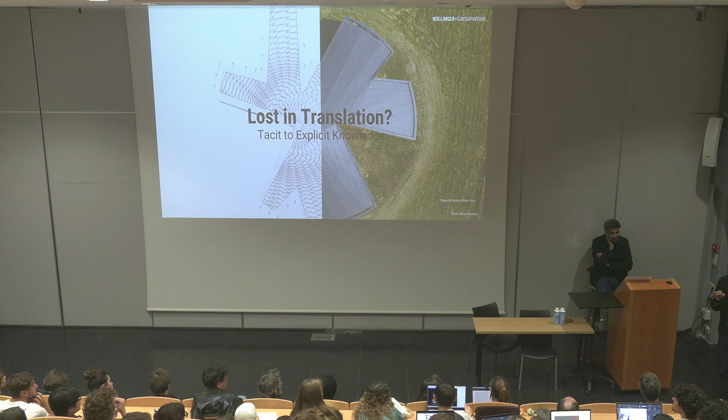So what happened is we met yesterday evening and each had our presentations, and this morning I asked my team to mix the two presentations together. So it's going to be a bit of a surprise for the two of us as well — we might have to jump some slides, and I don't even know the total number of slides. So if something comes up, we'll find out together with you. It's a bit of a journey for ourselves, but we have to put ourselves into these things, since we already talked about the conference for quite a long time.

We took this image because it's typically one of a professor that you have here at the school. That's one of these projects we worked on for a very long time — a very, very tiny project, 400 square meters for only 500,000 euros, so it's quite cheap, and it's very complex. That's the one project I wanted to use to explain the lost in translation.

Before that, one colleague gave me this image at some point. I don't totally agree, but possibly you've gone through this already yourselves on Instagram or somewhere. This is apparently how it's perceived, the way a client, architect, engineer and builder work together. At some point after construction, your nice concept idea, as you are all students now, you will face yourselves in some years from now. I hope it's going to stay true to the original conception, right? But it might be that you come finally with a project that is not entirely what you imagined.

So in order to challenge that view, that's what we and you have as a task for tomorrow. This is why I thought it would be very interesting not to just purely look at how an engineer perceives, nor just the architect, because we're both translators, and not so much translators as interpreters, which I find quite much better than just purely translating, because by now all the AIs are pretty well translating stuff, but an interpreter is quite much more than just a simple translation. I think this is a bit what we want to talk about today.

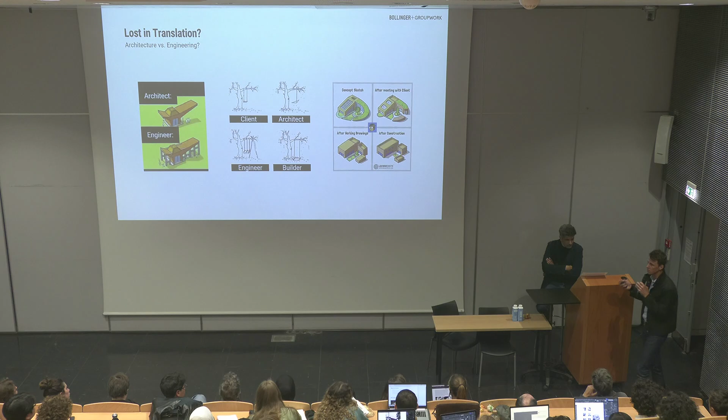So we've foreseen, I'll first give you the title, and why this title, and we'll show you a little bit what we want to try to go through today after this little introduction.

So here, this is the work from Ido Avissar with Hideyuki Nakayama. And this is where the competition came in. A very small extension for somebody, a very famous artist back then, Frans Masereel, who also made very nice pictures of France in the 1930s. Thomas Mann is actually also writing about this guy. It's a very small art center in Belgium.

The extension was an invited competition. Ido and his team thought, let's make a circle, a bit like the original building, but make it so everybody's working under the same roof, with special rooms created by cutouts. Fine as a concept. But they wanted to do the roof in concrete, so that you have the feeling that everywhere, everything is all the same at any single point, so there's no hierarchy.

But since I'm not particularly a fan of doing everything in concrete, just for pure ecological reasons, I thought, why not do it in timber, and also take the challenge to do it in massive timber. So you need to be careful about the length of the beams. We took back a conception from the 1400s, more or less, a reciprocal system, and we proposed that to the architect, and they were wildly enthusiastic about it, so they let us work.

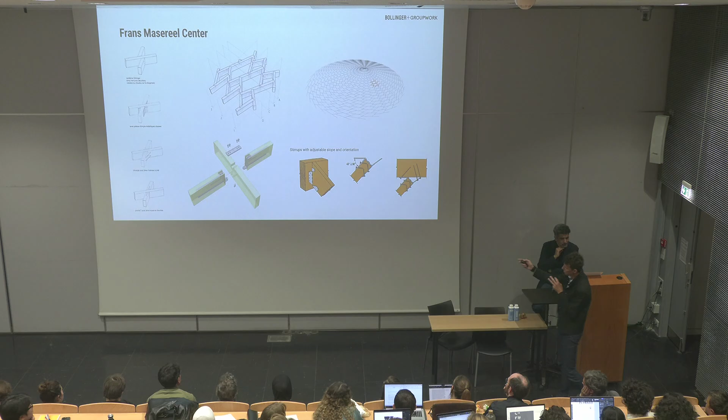So I thought this way of working - I won't go into the project itself, it got quite complex in the end, but we also know very well how to construct, and we know the contractors. So all the information from building details comes from the engineer, and we had to comply with the ones that are actually about aesthetics, acoustics, and functionality.

So if you bring those all together, how do you bring these two different matrices together? It's like an algorithm you have to build and generate together. That for me was the initial setup, why I thought about this series on being lost in translation. How do you do it? Because the challenge today is that only 200 years ago the French invented new schools, like the Ponts et Chaussées, to really make engineers work on their own. But how do you bring those things together to face the challenges of tomorrow? So these are some ideas.

So now I'm discovering this, and so are you. I think the list of projects... okay, we've got some time, huh? So if you fall asleep, just ask your neighbor to wake you up.

I see we have a bit of a theoretical part. I thought, what is your context? Today we decided, since we both work on a lot of different projects, that it might be interesting to have an architect from Great Britain, because with Brexit they're out of the European Union, so they don't follow the same rules. Second, it gives another view, since some professors here already work with natural stone. I think Thibaut Barrault is also here in the school, no? He said, why not give another perspective on it? So we're coming from outside, we're a bit the 'tourists' at the moment.

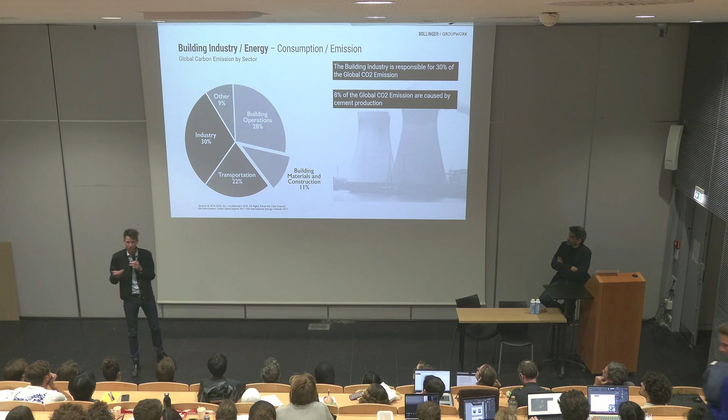So actually you are people with a certain impact. You are not to underestimate the impact of what you guys will do in the future. Do you still have the right to build, actually? That should probably be the first question. Maybe for France we don't need to build anymore, but there are enough countries in the world where you still will need to. And even for that, you guys have the power in your hands for the future. So these are the discussions.

I hope you already have this in your minds: embodied and operational carbon. I think those are concepts, nothing new for anyone, right? So what we're trying to work on is operational carbon - this has already improved quite a lot, and we're still doing it, maybe with a bit too much technology, so we might want to skip back to more natural ventilation and things like that. I think that's all very smart. The one we can actually really work upon is the embodied carbon.

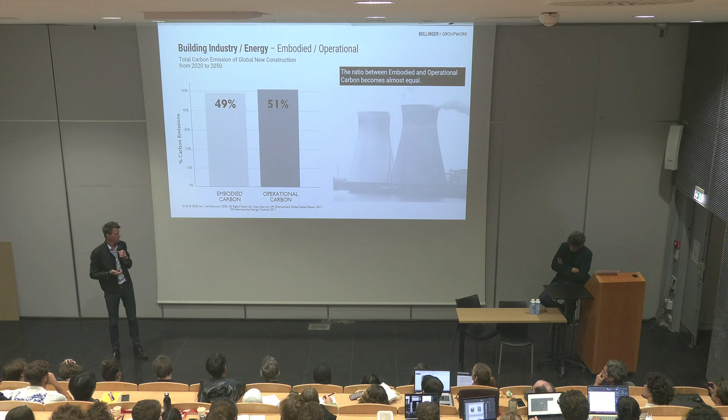That's one where you really, especially since we talk between an engineer and an architect, I think that's really easy to talk about. There's other figures I got from the press. 50% of global material consumption. I'm Belgian, and Belgium has the two biggest dredging companies in the world - that's the people who take sand out of the ocean. They get paid for that, getting the sand away so bigger boats can come in, and then they sell the sand to somebody else. So they get paid twice. It's a brilliant concept - very Belgian, I think.

So mining of sand per year is too much, we can't continue with that. The building industry is responsible for 54% of the waste per year also. So it's a bit of a dirty business, what you guys are learning at the moment.

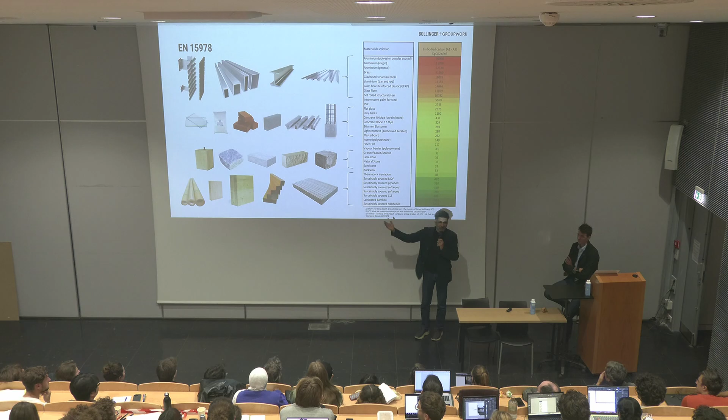Okay, why would you use stone instead of timber? Where would you use stone instead of timber? Somebody accidentally made eye contact with me. You, where would you use stone instead of timber? Perfect, foundation, superstructure. I mean, you can go up with timber in the superstructure, but at some point it makes no sense, you're using so much timber to go up tall, it makes no sense. You could be more efficient using stone. Foundations, maybe the external envelope to be very robust, and then some of your other materials.

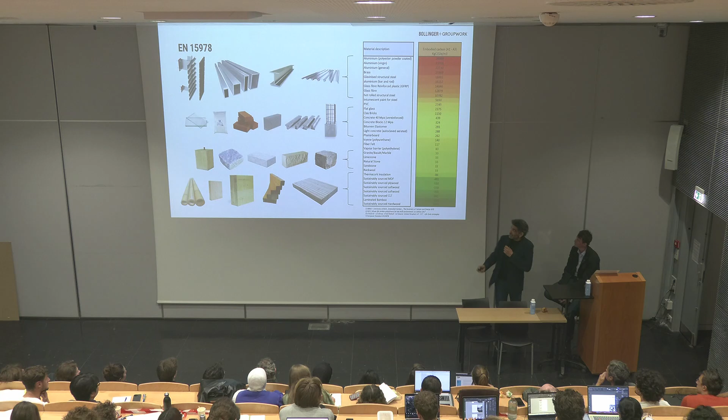What about timber, though? People say, oh, if we use timber - I go on these conferences where there's normally an engineer in front of me, not you guys. I won't mention those engineers who say, if all of us decided to use timber, there'd be no woods left, all of it would disappear, forgetting that sustainable forestry is a real thing. It's already active. Europe is actually growing its forest faster than it's cutting them down. Why is that? It's a decision.

Policy. So this is Slovenia, I think. Anybody been to Slovenia? Very nice place, 70% woodland. And they have a very, very straightforward policy: for every 100 trees we plant, we take 75 down. And those are normally about 80 to 100 years old. That leaves room for new ones to grow. So the forest is always growing.

Okay, going into your slides. So second, in the line of what, that's a bit of your context. I hope we didn't say so much new stuff, but because that's where you're heading for, that's what is the challenge for you ahead. The one where we thought, and we share that vision, and which should be quite interesting,

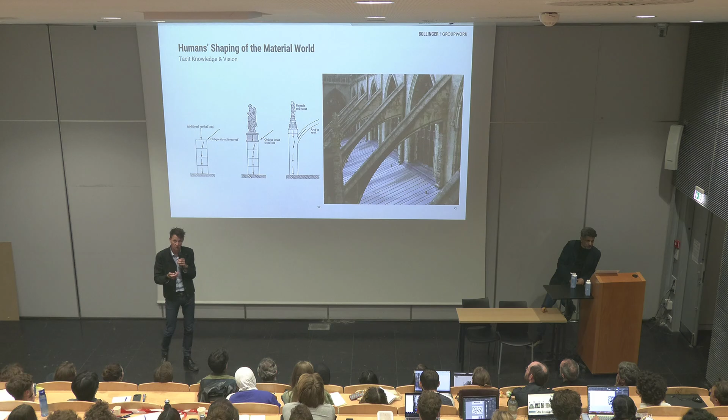So actually from these things we can learn from the past, even here from the stone master builders in the churches. These things have not been written down much back in the days, right? Graphic statics only comes up in the 1700s—it's quite late. But these people already built buildings 100 meters high. So some things they did know.

Here our friends Guastavino, or even a Roman concrete vault. Wait, that's not the right one, but okay.

Once you know how people build tacitly and how things work, like from the cathedrals, you could then—because you are architects, you have certain proposals in your head—once you know how the rule works, you can enlarge it or try to play with it. And once you make it explicit, you can actually try to think about it in an architectural sense.

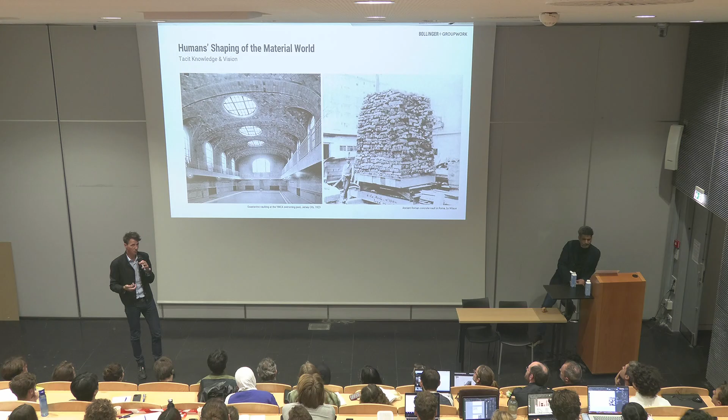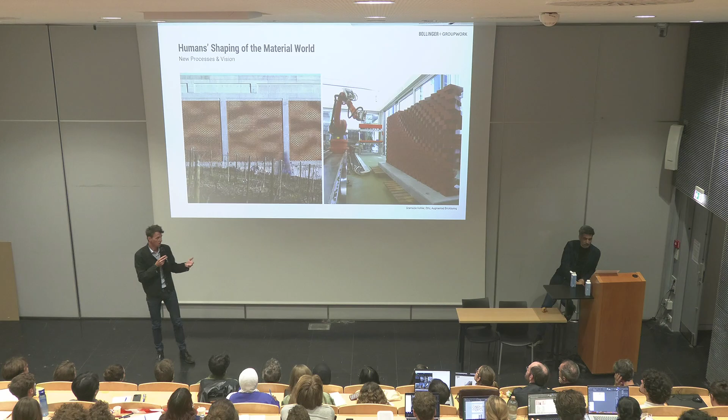So this is something—even the robots. We all the time hear some people say we should be against high-tech elements, which I find a bit weird, because all the craftsmen that we know, if you work with timber people, if you work with stone people, the way to go forward in their business is actually to use more technology, to use these robots actually to build for the future.

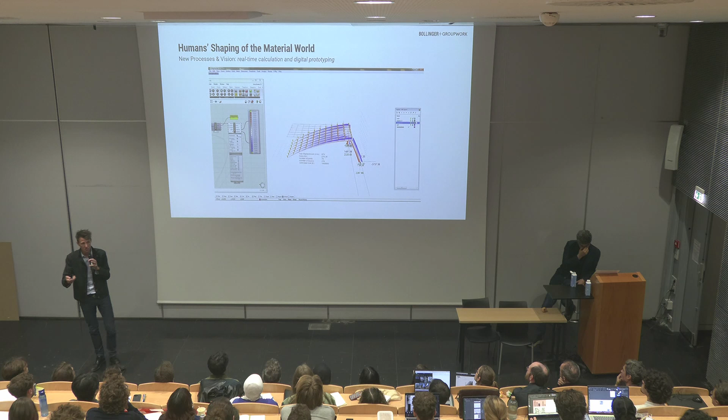But we have to use these tools architecturally. Even the tools you have at your disposal didn't exist 30 or 40 years ago. These tools are free, and you even have AI to help you. But I'd warn you that the calculations on ChatGPT are not correct, so be careful. You do need to know a thing or two about calculations before using ChatGPT for it.

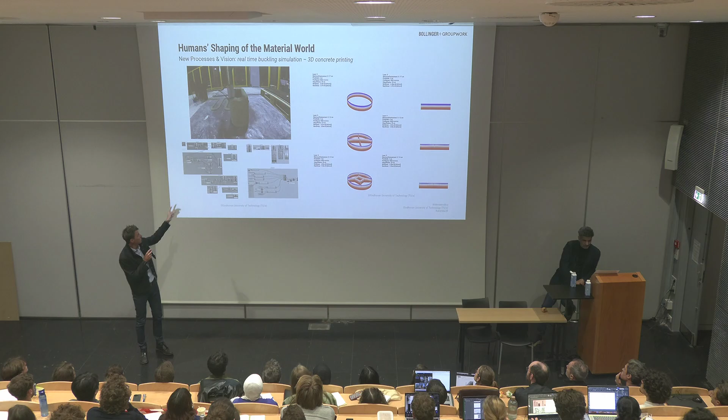But even here, look at 3D printing. The robot can give us direct information, feed it back, and tell us if the wall is going to collapse or not, through the buckling of these things. So all these tools actually exist and can improve our daily environment.

I just want to show this because I don't think we should oppose one or the other. We need both if we want to advance.

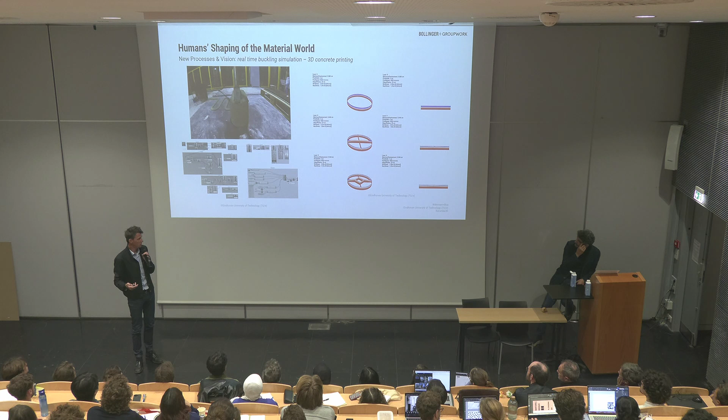And we talked yesterday still about Pouillon. Pouillon is typically the guy who showed that we can build with stone, of course. And also all these things - it's a slide, maybe not so important, but this is where the real power is.

Because when we make changes later in the process, it costs a lot of effort for everybody, and we cannot make these big changes anymore. So here in the concept design, if you already have a lot of parameters readily available, if you know how to construct, it can help basically. This slide I will not cover.

And then experiential pedagogy, that's the third theoretical part, I would say, but it's not that theoretical. It's just that Amin and myself have been able to work with a lot of students in the past. And one thing we notice is that we ourselves were not trained in making much. I don't know about you, Amin, but for us it was much about drawing, much about... it's a full world that is very abstract.

And we are a bit lucky in a way, we can have fun also in making things. And we hope, of course, from our perspective, that it brings you back closer together with the people who are really on the construction site. Because I see that these people are very lowly paid, not well trained.

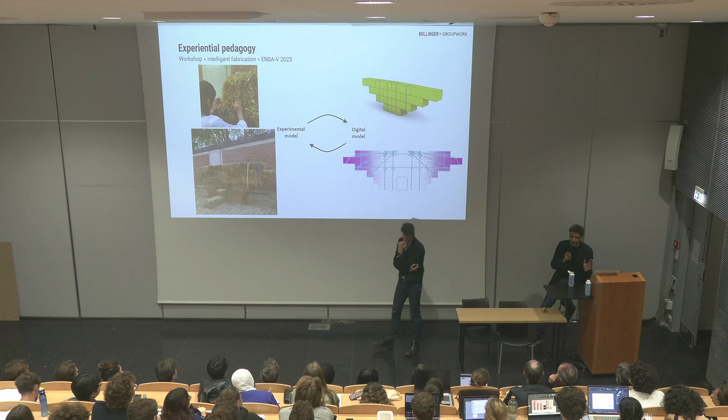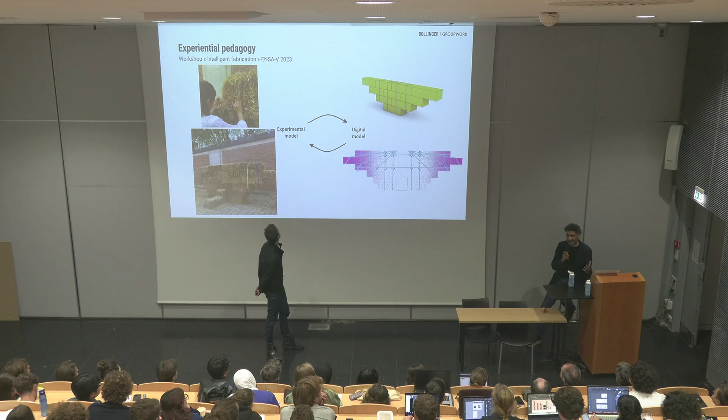But that's part of the issue we're talking about, which is the responsibility. Responsibility really lies in the Industrial Revolution - Britain in the Industrial Revolution being so heavy with workload and master builders. So all of you would have been master builders, or apprentices to master builders, architect in lowercase. But the amount of work going on made specialization inevitable. So the first people to specialize were those who did infrastructure and engineering, and they became what's called civil engineers, not military engineers.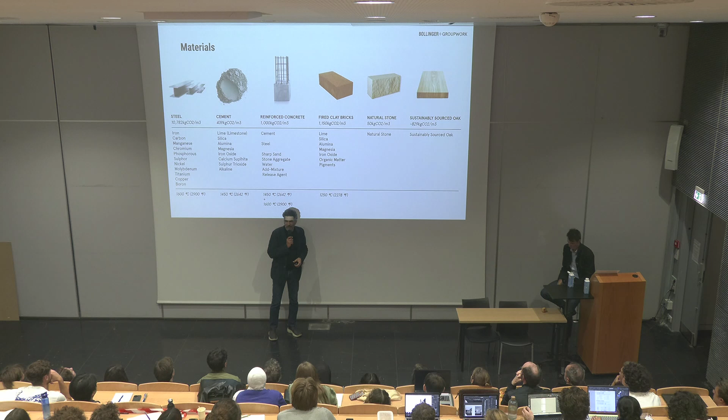Brick became very popular in the UK more recently, in the last 10, 15 years. I dare say we blame the Belgians, because before then it was multicolored cladding, plastic cladding that was highly flammable. But now we have brick. Again, multiple quarries, burnt, and we come back to stone. One quarry, no burning, just cutting, processing, and obviously timber.

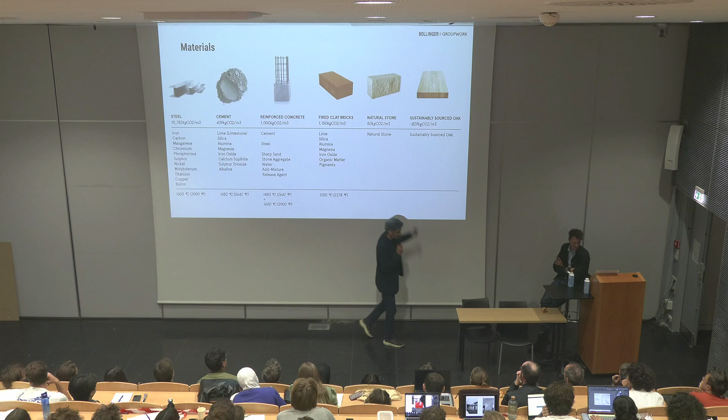No, the choice is actually not so complicated. The knowledge is here, we are in France, so we're talking mostly about France, but for France this should be, and you're getting taught in it, when we could ask ourselves, is it a modern material or not? It has been around, so we can actually do pretty much with it. And so the quarries, the geology is all present. France has a rich tradition. There is actually in Europe, and I went recently to Pakistan, I went recently to Kenya, I went to different other countries where actually there's still quarries going on. The knowledge is actually pretty much around.

So we've been using it for quite a long time, at least since the Egyptians. They put just big blocks. They didn't know how to put it smaller, but I think it has been around, so we can do something with it. It's quite massive, no?

I mean, you have to be, it's the technology of running a quarry is quite interesting, and there's much research in it, if anybody is interested in that. There's different cutting technologies. There's also ways of reducing the carbon footprint of cutting it either through the energy, but also to go into the mountain rather than have an open quarry, all these things.

So, and these are some of the machines that have allowed us in the last 60 years also to go faster with this. And this is typically because why I think Pouillon is now also famous in Great Britain. He was a liberal, right? He was very open to have a lot of money. And he was putting up businesses, so he was a businessman. And I think in architecture circles, that's not necessarily the thing you bring together with an architect.

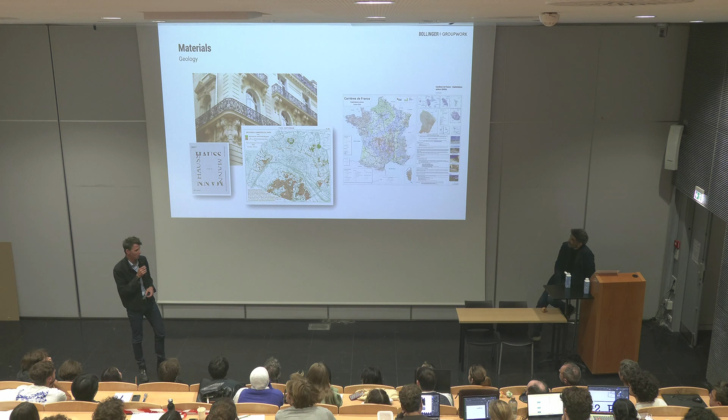This is all things—even for Paris, it used to be a big quarry, right? So most of Paris has been built out of Paris, which is a bit of a problem. If you build in one of these zones, now they ask the private clients to fill these holes and pump them full of concrete. It's brilliant—we will have a massive socle in concrete that we can probably cut out as stones again some 1,000 years from now. Not sure about it, but okay.

So anyway, I think there's some knowledge—learning from the past, tacit versus explicit. There are things, again, there's so much knowledge about this already present. Pouillon was here. So again, learning from the past.

This is about 12 years ago. It's dry stone for a vault of about 20 meters, only 8 centimeters thick. So it is possible—learning from the past, it has been done. We are able to do it, we just need to scale it up sometimes. This one here is in the UK, King's College Chapel, 6 centimeters for 12 meters of span.

It's thinner than an eggshell, so it's actually quite good.

We can learn from this, and honestly speaking, the godfathers of concrete in France were all taught by this guy: Paul Séjourné, who was a professor at the Ponts et Chaussées. Albert Caquot, Freyssinet, and all these people who invented new ways to improve concrete were his students. He was the last one in Europe, more or less, to build the biggest bridges in stone. He has some very good books on how to work with stone. So it's all there.

And if you ask people to redo it today, they say, I don't know how to do it. But this was only 100 years ago, so it's not very long ago.

I won't go into the exact methods, that would take us too far, but this is the usual method, and it means that you as an architect can really do this. It doesn't seem so complex, does it? It's just graphic statics, and it's been used. The methods are actually pretty open to everyone, so if you look at all these things, we could use them again.

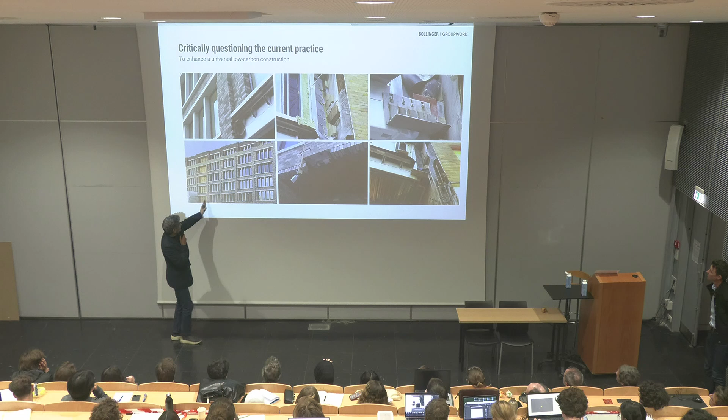This is the UK, buildings just around the corner from our office. You can see the brick there, which would have been an explicit teaching of how to build—these would have been piers of brick or stone holding up spandrels that then hold up the floors beyond.

But no, somebody's put up a steel frame, and the exact same bricks that are perfectly capable of holding up the whole building are instead being suspended on every floor, built slowly from the top downwards like a curtain. And if you look carefully—the slide's a bit dark—in some areas there are pieces of plywood with skins of brick glued to the underside, because the practice has got graduates in who've modeled it in 3D, pressed a button, brick render all over, including the underside. Is there anything wrong with that?

Well, eventually it just falls off, doesn't it? If you're gluing brick to pieces of timber, eventually it's just going to come off. But by this stage, more than 12 months later, the builder's liability is finished, so ultimately it goes back to the architect or the engineer. Did you pass this? Try and avoid it. Try and learn your materials.

Luckily nobody was killed in this one, but you probably know the UK is currently going through its crisis of making things as cheap as possible—architects lowering their fees so they're not really looking at drawings anymore, asking somebody else to look at it instead. And of course we have buildings that burst into flames and kill people, as well as this sort of business.

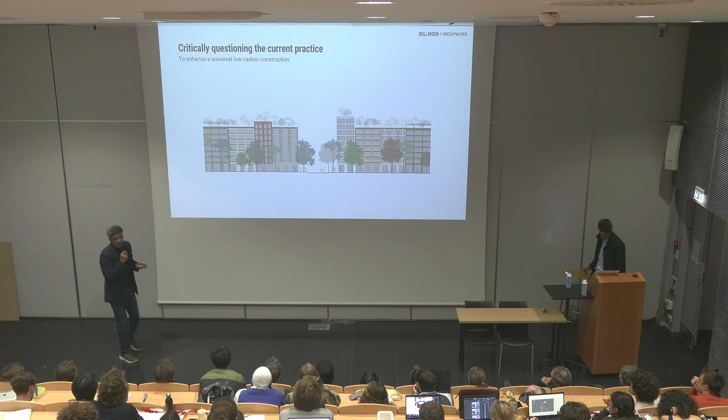That's why it becomes cheaper. These are exercises for another developer in London. So this is about showing them - this is not our design. This is saying: you have already got an architect to come up with a beautiful elevation of a new street, all BREEAM diamond outstanding, but built with a steel frame, aluminium, all the red areas in that menu of materials.

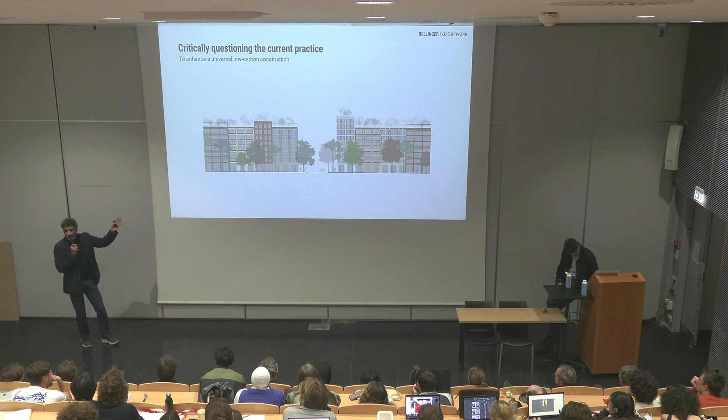And he's asking us, how is it I'm getting diamond? Can I bring that embodied carbon down? So this is how they're doing it - normally steel or concrete, exactly as I was explaining before, everything is suspended. How can you make it differently? Well, we've been working with engineers, and Klaas knows this system, which is basically taking floors, beams, and columns, not as massive pieces of stone, but if you like, shish kebabbing them.

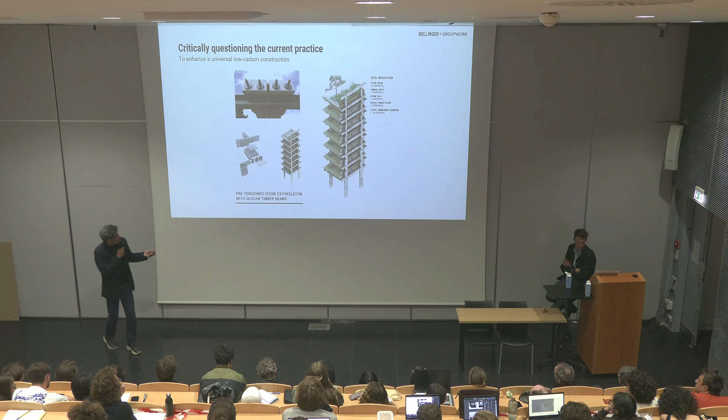You drill a hole through them, you tighten it, and it becomes a pre-tensioned column or beam in the yard that you can transport, lift with a crane, and bolt together just like a steel frame, except it's 99% stone with a piece of steel running through it. Or timber structures with a stone brick facade. So, the stone - people forget, you can cut stone into any size you like, including what looks like a brick. But instead of firing it, in any color, you can replace the otherwise fired clay brick.

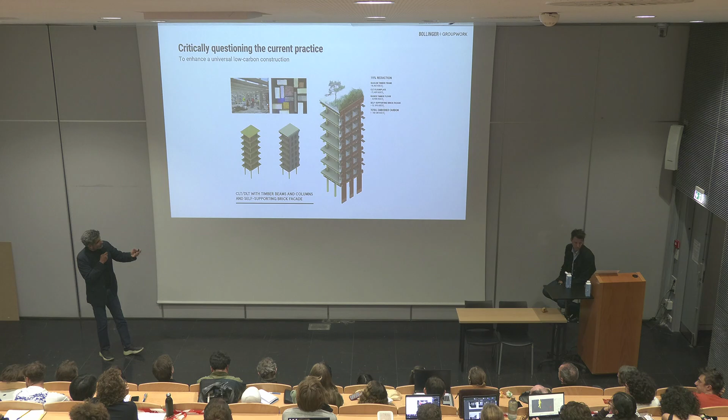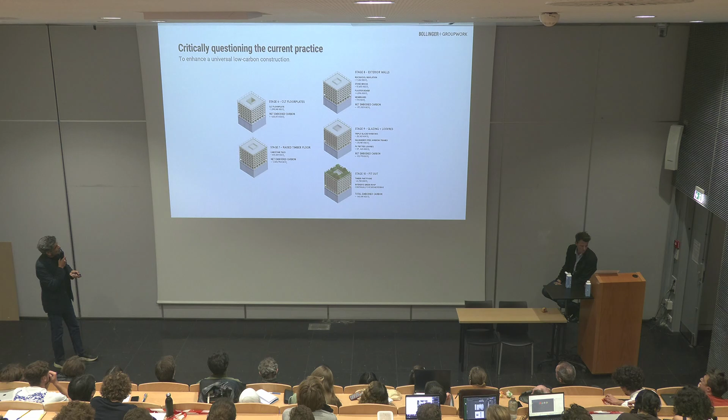These are permutations on the same theme, showing how you can drop the embodied carbon of that typical construction system. This is again for the same developer. I'll have to go through these at a pace because you're not going to remember all these figures, but you can see if you have all concrete solutions, even with a concrete base and piling, you can then replace it with timber, and depending on the height you go, begin to substitute it with stone or clad it in stone.

This is a system that shows you that column, beam, floors - all this is stone, even the bricks are stone. They're being cut, so a bricklayer doesn't look at it and say 'oh, what's this, it's a special, I don't want to lay it, or I have to charge you extra.' Here it is exactly the same size as a brick. It looks like what's called London stock brick.

But a fraction of the embodied carbon, 98% lower in its embodied carbon after cutting it down to brick size, yeah? Same price as a brick.

Why would you ever use a clay brick again? Anybody? Anybody come up with a reason? No, exactly, because the Belgians live off it. Because you are evil, Belgium.

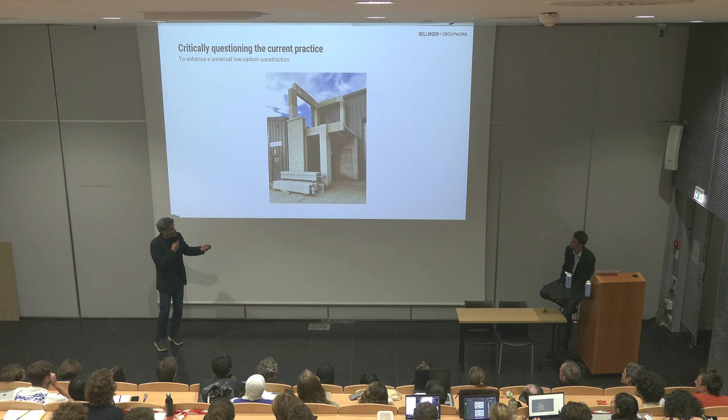There is the system where you can see at the end some metal plates that you fix together. So if you're in a seismic zone, for instance, and this structure wants to move, the stone is doing fantastic in compression, but it's absolutely no good for movement. So what you do is make your fixings like a bucky joint: the end is metal, while the rest of it, where the threads go through, is stone.

So we're moving into real examples now. I think we get there slowly, but really, it's like with stone, it takes a bit of time. Just with these, I think this is the stonemasonry where this was set up.

So these are magnificent guys, and they are all called Pierre or Alex. It's like otherwise you can't work there. And they're all French because they've all studied - it's in Great Britain, but they've all done their compagnon in France. Recently my son did an internship there. He's never going to do it again. He had to cut a little octagon, and it took him 2 weeks even to do half of it.

It's really a job to learn. You need 5 to 7 years to really become a stone master. So it's not really just a simple job. And they are really good, actually, so if you have the chance to work with them, it's really interesting.

So let's go to the projects, and we start from a bit smaller to a bit bigger. We choose not the most, like, it's also housing - it's really the market where we want to see things happening. And it's a lot of testing.

So the first one is really small, a little pavilion in front of the Château de Versailles for ChartierDalix, where the idea was to have a green wall in front of the chateau, a circular pavilion when you come from the train station. And they wanted to do that exclusively with reused stones that come from the Région Île-de-France.

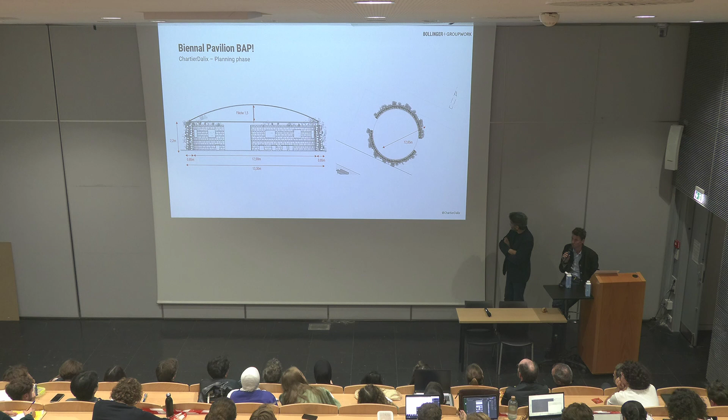So it's actually stones that were broken once they were used for the roads and all different things. It's from the technical department of the Région that they gathered these and cut them to size, basically. I thought this is a very nice example, a kind of spolia idea, because the pavilion not only got built up here in Versailles, they used it again for the Olympics.

Then they took down stone by stone - it's dry stone, and that's why you have the thickness of the wall. This was some ideas for the roof, so we had these chips for the roof. Unfortunately, they put beams underneath - I don't want to show it. That's the contractor; he was not sure about our solution.

But this is basically, so you have a certain thickness. You also have the rounded shape so that it actually holds against the wind and the lateral forces. The thickness - sometimes you have a brick that goes across, so it's one inside, one outside, and then some bricks that go across, so that the pressure of the earth actually is diverted and that the wall can hold it up. But you see how they cut it?

And I thought it's a nice idea to really talk about reuse, but also dry stone, because stone is mostly a hybrid solution - you need cement or glue to really put them together. In the regulations this is quite complex, because most of the cement or mortar that you use to level out the tolerances between the stone reduces structurally almost by 3 the load bearing capacity of your stone, which is quite a lot. The gluing is much less, but according to Eurocode, you can also only take it up to a certain level.

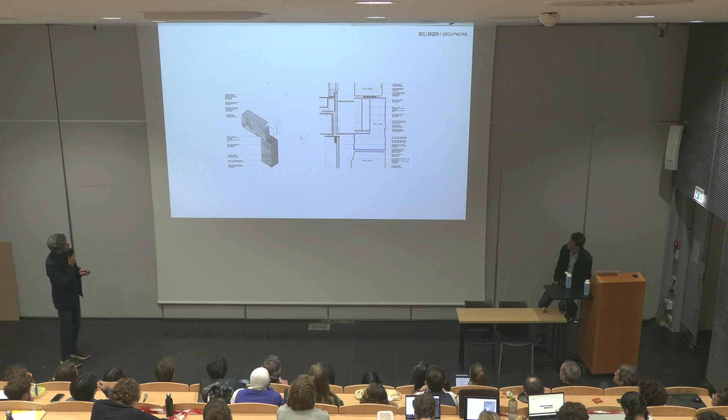Testing it, and then deciding, okay, instead of a grid of columns, if we use the stone as a facade, but what's called a load-bearing facade, as an exoskeleton, everywhere there's a column and a beam meet, it's then connected to the floor plate, which means you don't need any internal structure. You just have the core, the lift and stair core, and the rest of your interior can then be free. Free for an office, free for an apartment, free for 4 apartments or a hotel, flexible for its use, and therefore made entirely out of timber.

That's us, I think maybe 2014 we started, finished 2016.

So there are the minimal finishes you gain from the quarry. And if you'll notice there's a gap. The reason there's a gap, as you can see, is the stone is moving because it hasn't been carved up much, just cut simply. That means it's fairly cheap, inexpensive, and if you put sort of 30% timber, 70% glazed curtain wall behind that, then the water shoots past. You don't need any special sealing of it.

Okay, so this one you can visit actually at the moment. It's under construction, in the 14e arrondissement, Lot Petit, where the former hospital is just around. It's an interesting project already simply for the fact that it's with 3 architects: Kuhn Malvezzi, Nicolas Dorval-Bory, and Plan Commun. So that's quite already exceptional, I would say.

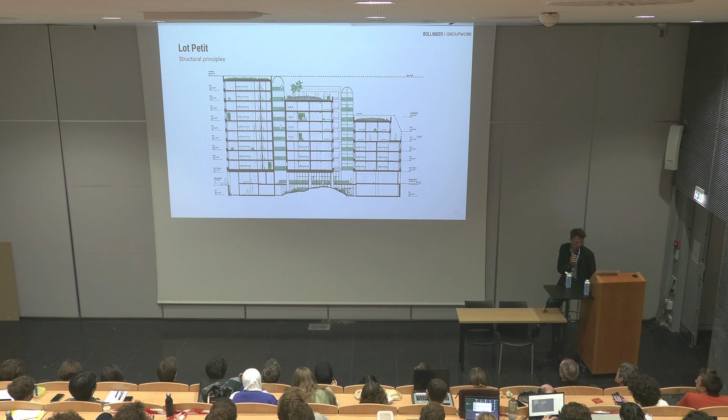I will flip through the plans. So if you drive by, I think you can visit the whole site. There's a lot of new buildings actually being erected at the same time. There's also one from Lacaton Vassal, which has not been awarded yet to a contractor, but there's a couple of others that are quite interesting.

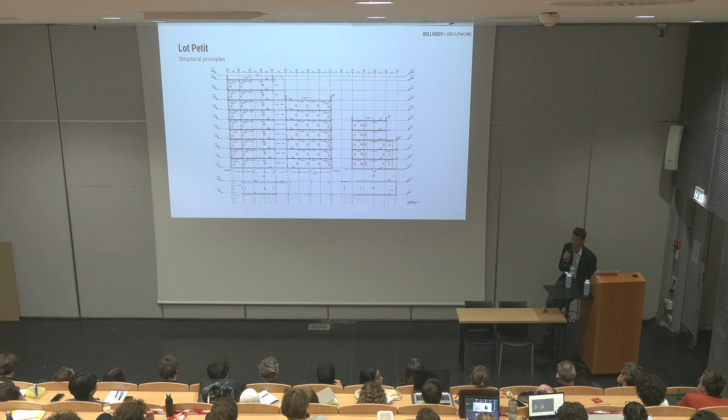So nothing special. The floors are all made of CLT. The core is out of concrete. And then there's a mix of bays made of prefabricated concrete elements so that the windows can be fit into that, and then there's the natural stone. So what's interesting for us as well is that we go back to this hybrid approach for constructing also. Usually contractors are not so happy with this way of working because they don't necessarily have all the specialists themselves, but the future of building is definitely much more hybrid than these monocultural buildings we had.

So it's a bit hard to read, but it's an interesting aspect, here you see the build up a bit.

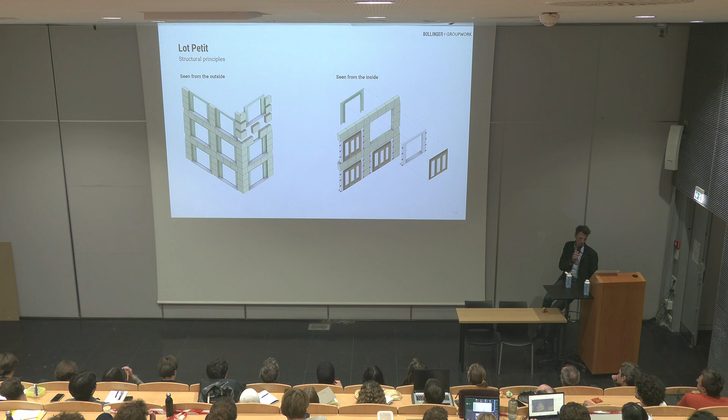What happened over time with stone, as Amin already showed, detailing is quite important. If you don't want to end up with steel everywhere again with all these elements, you have to detail it yourself. You have to check the water barrier, and the insulation, because the stone is also capillary, so there are changes in hygrometrics behind the stone. The choice of insulation on the inside has to be careful so that it doesn't get full with water.

So you have to choose carefully, which one did we use for insulation here? Wood chips, wood fiber, yeah. You have to be careful in that choice.

Another interesting learning lesson for us: the beams above the lintels are just cut so that, basically being a flat beam, through the cutting pattern they function as a structural arch. The compagnons know about this, but as a structural engineer or architect you would have to know about it too.

You have to plan all the individual blocks yourself, you cannot let anybody else decide. And you have to check which machine they have, so that you don't take a block weighing 2 tons, because the guys can't handle 2 tons per block.

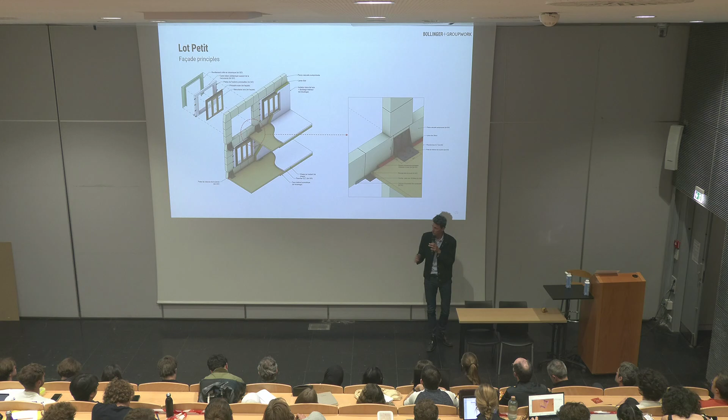Let's say you have a stone of 50 MPa. If you calculate with a mortar that's only 10 MPa, the whole thing goes back together to 14 MPa, or even 10 - you have to take the lowest value, if I'm not mistaken. In any case, it's a hybrid, so you can have the most fantastic stone but you're depending on the weakest material, the mortar, so you have to be careful with that.

In the end, instead of using more expensive blocks for enough rigidity, the contractor had the idea: if I change the mortar to a very high yield mortar, I can up the value of all the stones, and then we can use the less expensive stone for the whole building. This is the kind of smartness you need from the people on site - it was actually quite good, so we could build it cheaper. And it's still a social housing project, so I have to say this is quite fantastic.

I could not imagine another place than France to build social housing in natural stone.

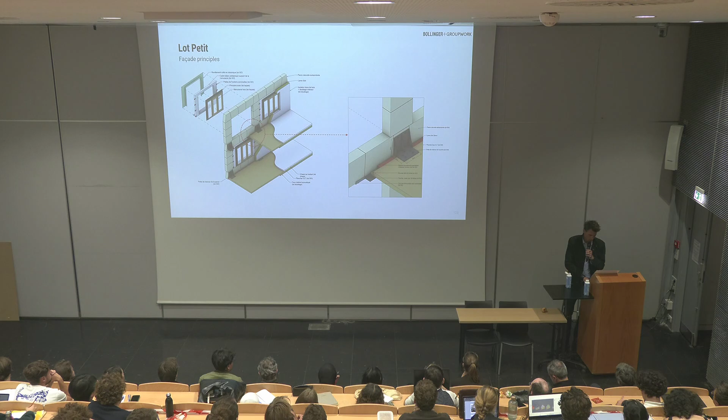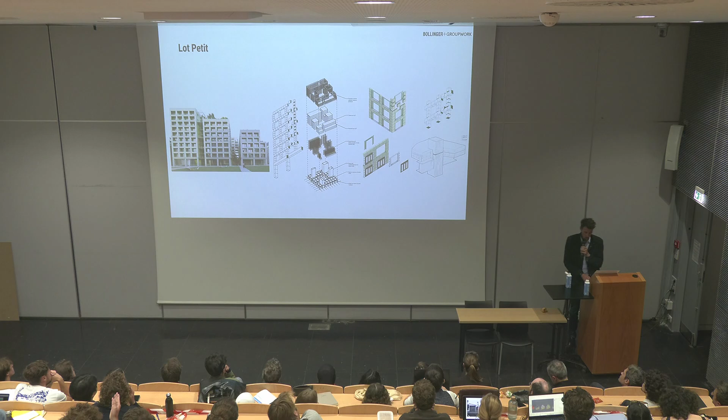So this is the cutting pattern. You have to work on it as an architect and an engineer also, because it really has an impact on the cost, on your aesthetics, on the structural viability of your whole project. So this is the constituting elements, and you have to go into detail, whereas in France we don't necessarily make the execution plans ourselves, but you have to imagine yourself going quite into detail.

So this is how they do it. And be careful with this hook. It's still the same machine they were using in the 1500s, actually, it's just more electrical now. These guys have to be careful that their fingers don't get into it, which happened on the construction site once. But he didn't lose his fingers, no? So happy, so.

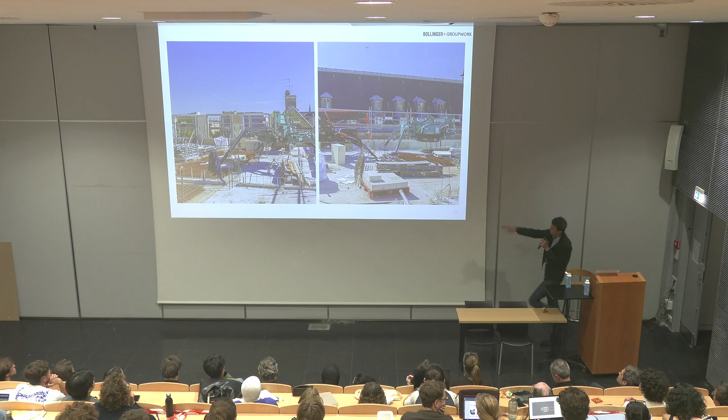But it's a dangerous job, construction. So here it's quite beautiful. They are storing, and they have to be careful where to store the elements, because the CLT slabs, of course, it's quite a weight that you would put on it. So this is more or less where it's at today. It's already a bit higher.

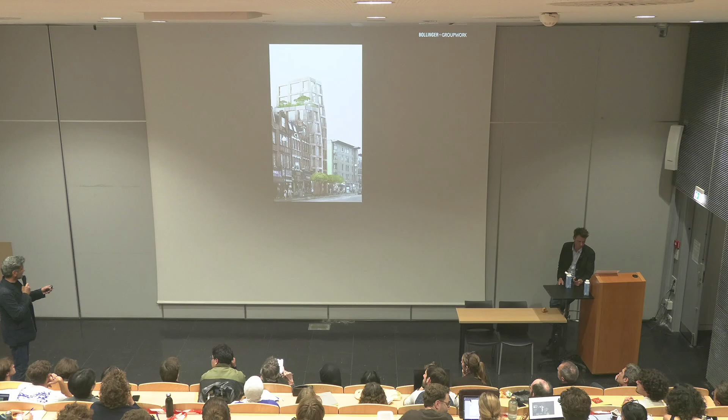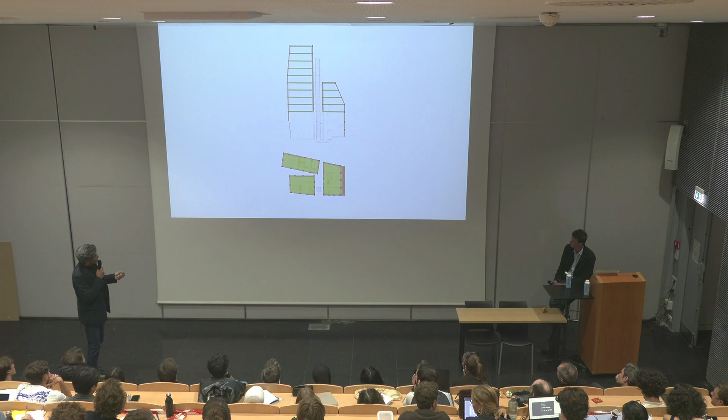Then I'll let Amin continue. So within a couple of years of finishing Clerkenwell, we were asked to have a look at this on Finchley Road in central London. So this is the frame system again, but what we learned was that instead of concrete floor slabs, we split the building into 3. It actually worked out to be cheaper than infilling this with construction and leaving the escape core in the middle. The floor slabs and internal walls are then CLT.

So really you've got a basalt stone frame, because again, choosing your stone has different consequences. With limestone, you would have to have 4 times the amount to last 2 hours in a fire. In the UK, once you go over a certain height, the structure needs to last 2 hours while firemen are putting it out. Basalt is a quarter of the volume of stone you need, so it's a quarter of the price, a quarter of the transportation, and so on.

That's it going up on temporary props, and then eventually the basalt goes up, again, a prototype before we erected it. This is, yeah, there we go. So you might have a look at this.

Maybe 4 years ago, I was at the Royal Institute of British Architects doing a presentation for the 6 best buildings that year, one of which was going to be chosen as the best building in the UK and get the Stirling Prize. The 6 architects were in front of an audience, and I asked them, what is the embodied carbon of your building? Does anybody know? All buildings were made of brick, red brick, yellow brick, you name it, brown bricks. Nobody knew. Nobody knew the embodied carbon of their materials.

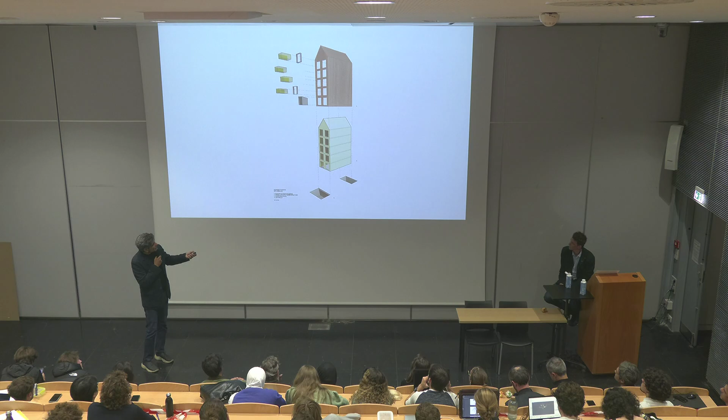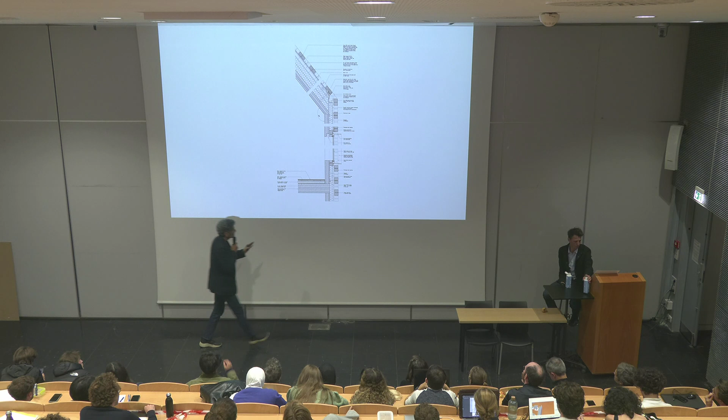Walls, floors, roof. And remember what we said? Modern construction, you need a separation of your external wall from the inside, with normally a cavity, insulation, and then normally the internal structure, or it's an external structure. There's a thermal separation. So what you're looking at is floor, walls, and roof as structure, but nothing else. What's happening is you've got insulation with a vapor check, a cavity, and then the stone bricks on the outside.

When we modeled it first, we told them it's going to be cheaper because you don't have to put aluminium with plasterboard, with plaster, paint, skirting boards, dado rails, and all the rest of it. All that disappears. So you're saving on material, you're saving on labor, and you're saving on time. That's how you reduce the cost.

When we said that to the client, the client eventually went for it. But initially the agents, the cost consultants, said, are you crazy? You're going to end up with a timber interior. Who the hell wants to live in a timber interior? Swedish people. Swedish people moved in—actually, just one.

But the client said, I had nightmares. No one's going to move in, I'm going to fail. But it immediately went full, and he said, what was I thinking?

The timber is much better than the plaster, because when people move suitcases and furniture, they scrape the plaster, don't they? You scrape it, you have to repair it, you have to repaint it. Well, the timber over the years gets its own natural patina.

The Italian government gave us some money to find out what you can do with broken tiles and stone tiles. If you cut stone to 10 millimeters, you're going to get a lot of wastage—a lot of those tiles just break naturally. So they've got mountains of broken tiles, and they imagined we were just going to glue them back together like terrazzo and sell them again.

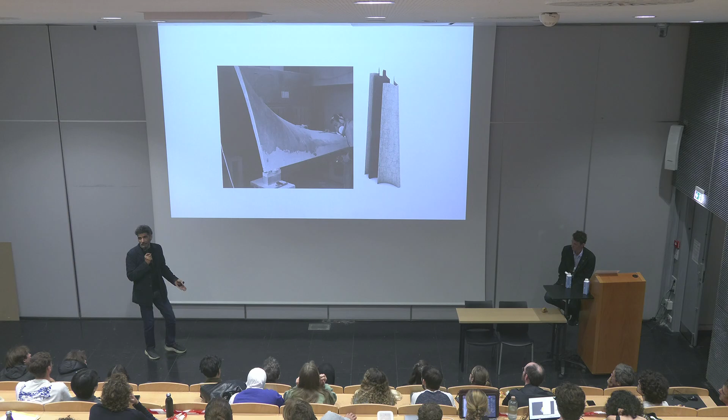And we said, if you're gluing them back together, why don't you put them across a piece of formwork that has its own structural form, so the tiles become pieces of structure. We actually did a number of these, but this is the final one, where the glue essentially becomes the marbling—we put a bit of pigment in the glue.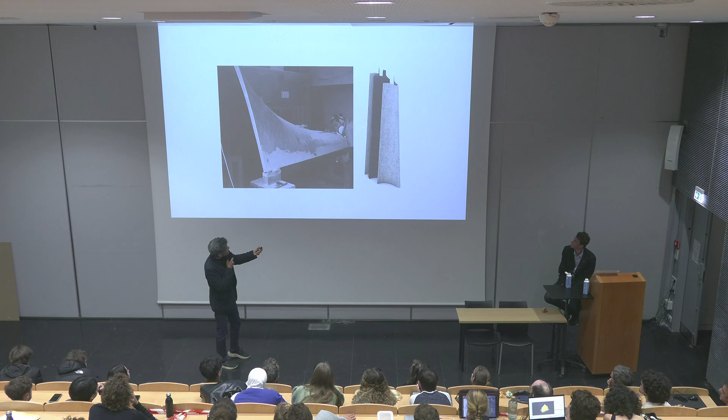Internal insulation, internal face, then external face. It's 4 meters tall—it looks like it could be sort of 4 centimeters there, but you need a person to stand there for scale. This is in Seoul, for the Seoul Biennale, but there was COVID, so it was constructed and immediately there was lockdown. Never saw it.

Last thing we heard was that they had to put it in the bin after they smashed it to bits. But there's a version with 3 tiles made into a sort of barrel vault, a truncated cone barrel vault. But the simplest form is just stacking it, one piece of stone on the other, and leaving it as raw as possible or clean cut. It's up to you—very, very straightforward.

Next, you'll see experiments in pre-tensioning. Can you see that? That's 1, 2, 3, 4, 5 pieces of stone—remember what I was talking about, you shish kebab them—and then tighten the ends.

Now, this is the control piece, how we wanted it. Some of those are 18 meters long, because that particular client wanted 18-meter lengths. Imagine looking up at the ceiling—this is a floor slab, 18 meters long, in that shish kebab stone.

Same with the beams—you can see there's an experiment with a beam. Some of those are 8 meters long. And then here, making these off-site—these are the arches, ribbed arches, that are then interconnected.

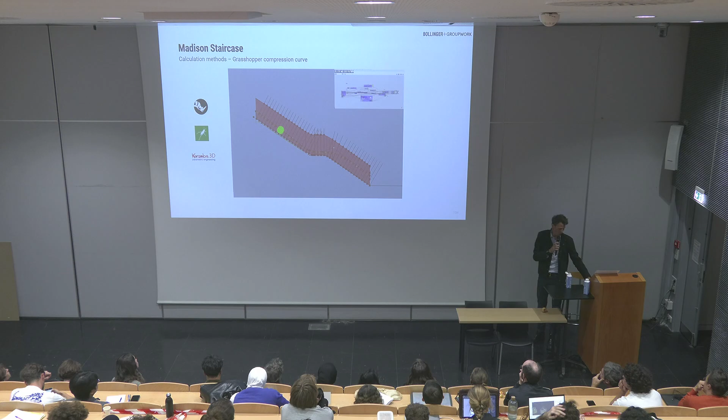I don't know if you will see it—I will not show this—but this is what's happening: it's under compression on the top and under tension on the bottom. Typically a beam on two supports, and that's where you use the cables.

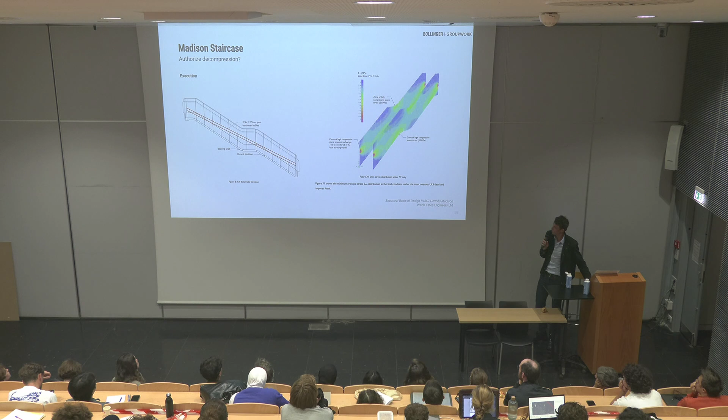What's quite interesting is this is from Webb&Yates actually that we took it. So the cables—we did this whole complex way of putting the cable in, but this is very complicated, because just for your information, the railing is only 8 centimeters thick. It carries over 13 meters, 8 centimeters.

This is quite nice—it's very thin, and it's been CNC'd entirely, with the handrail and everything. But for the holes, to make them precise, they were a bit afraid that if we followed exactly the right way of this cable that we drew, it would be too complicated with the tolerances.

So they said to do it straight, meaning there's a little bit of tension between the stones on the lower part, so it can open up a little bit. There's no Eurocode where you can actually allow for that. There's a certain interpretation in the English and British code, but this is in America.

So the nice thing is, if you know the engineer, know the other engineer, know the contractor, know ourselves—there's nobody else checking.

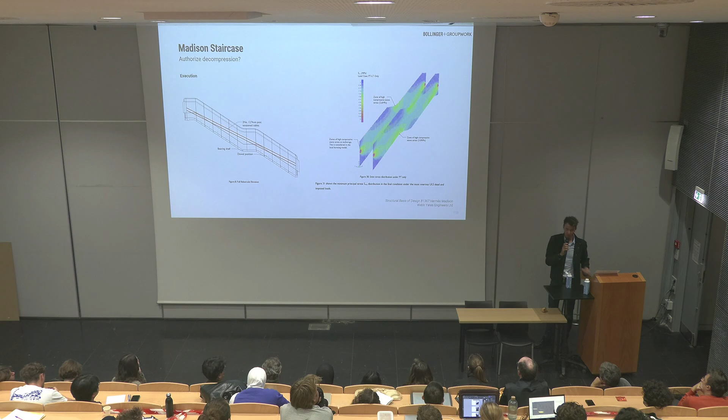So we do it ourselves. That's also nice. If you know how and where it goes, you have to write your own story, right? This is quite important also for you, for your future prototyping. Just take everything in your hands. Don't give it to anybody else.

It's the best advice I can give you.

So it's very simple. These also help the beams, because when you try to compress it, they would experience lateral torsional buckling. Normally you would need to keep it straight at the top, but the steps would still help so that it's not swaying too much. So it's also for the horizontal bracing of the whole stair.

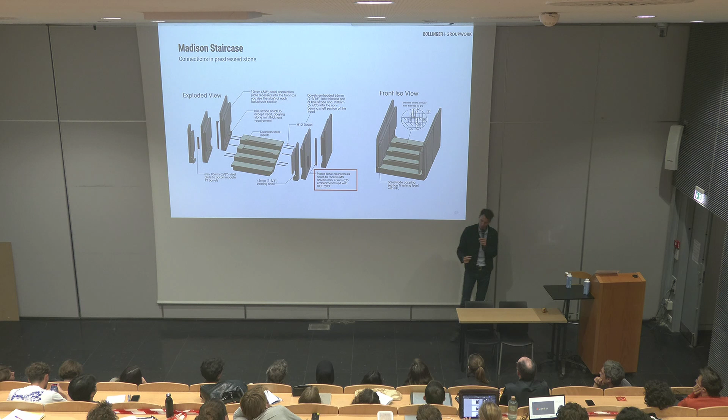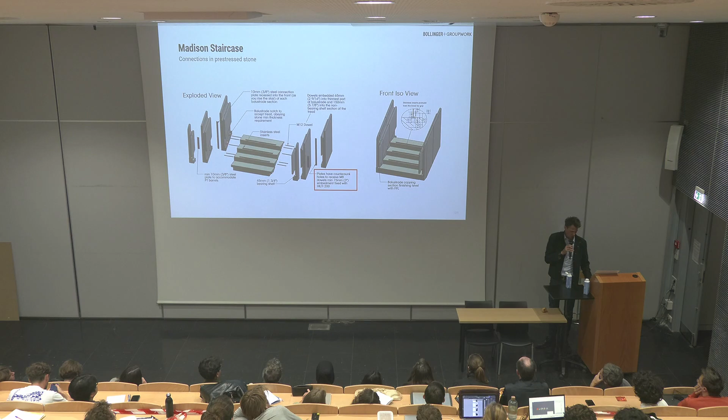So they are slotted in with certain steel elements. Between the stones there's a setting plate in steel, because when you start to tension it, it can crush the stone too much. So you have to be quite precise, which was something we had to learn a little bit on this one. But the result is quite amazing.

It's 3 stories. Well, shall we just flip through these and then go to the conclusion? Is that okay? No, the room is like...

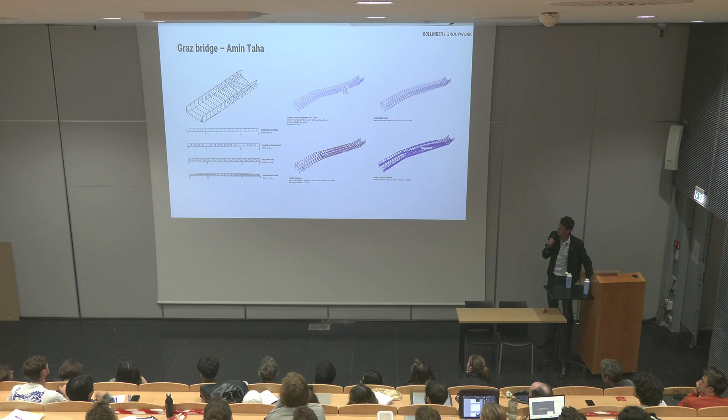Yeah, you can see there that you can use stone as beams. It's exactly like your staircase, and if you keep cutting out, eventually you get a truss. So you get the truss. It's possible, and I will show you, because you didn't see that one yet, Amin. I did not. No, that's what we're building right now - actually it's a truss in stone.

But there's one thing where we are a bit less happy, because actually one out of two could be a cable - there's one under compression, one under tension. But since it's a bit in cantilever, it's a bit of a hybrid. So it's interesting, but it's ongoing, so it exists.

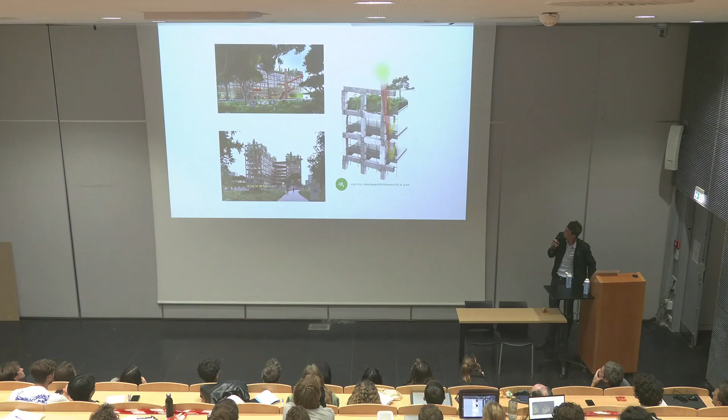Here it's the same technology, but also making use of a building that was already on site - making use of some of the old materials we found on site, plus the rest of it's timber.

Upper Street has nothing to do with stone, but it's all timber - timber with a load-bearing twin wall of a sort of terracotta cement mix.

Sorry, I'm going quite fast. No, go for it. Yeah.

So there is choosing your material to tell a particular story. Obviously, this is a reconstruction of a World War II bombed site. It was just reconstructing what had been there, but because there was a desire by the local politicians to rebuild it, we were saying, well, the desires for monumentalizing the past are flawed. Therefore, let's pick a material that is flawed, and in the detail you can see those flaws. But feel free to carry on.

The rest of it, in the new inhabitation of different floor levels, is entirely in timber.

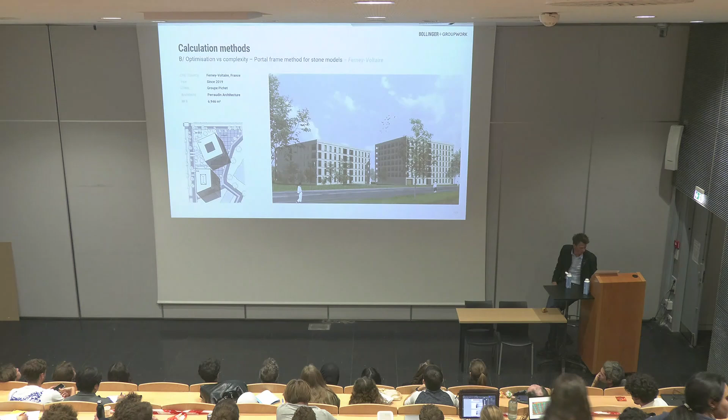I will not show this one - it's Gilles Perraudin. The construction site should be starting soon-ish. I wanted to show it because it's in a seismic zone, so it's always a bit complicated, and we tried to develop our own tools to make it faster also.

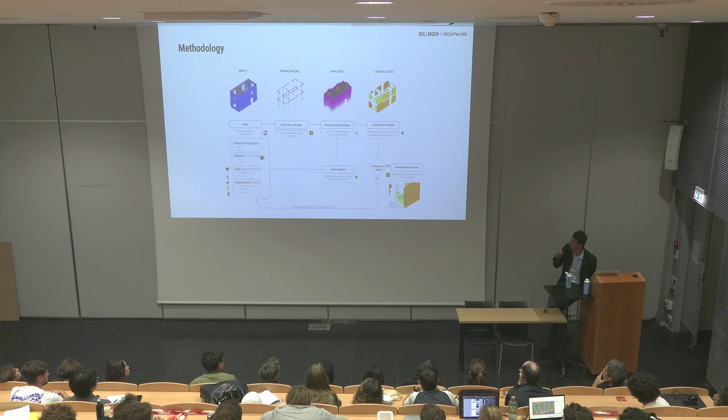So we developed with the team a new calculation method for this kind of buildings also, so that you could go faster. These aren't common yet, as there are new regulations being made at the time we are speaking. So it's research also with our team internally, with the French state - they are much interested that we update our calculation methods.

So, I think what we want - at least what we thought to conclude with is, what is our future, or your future? It's really that you used the word already, the master builders. So what is a master builder? It was not the engineer and somewhere else the architect - it was engineer and architect together.

And also the value - so I think this is one lesson for us to take with us. It's also to prototype and really combine old tacit knowledge with new knowledge. So this is a competition for doing pre-stressed beams also, and you've already shown real examples that are being built.

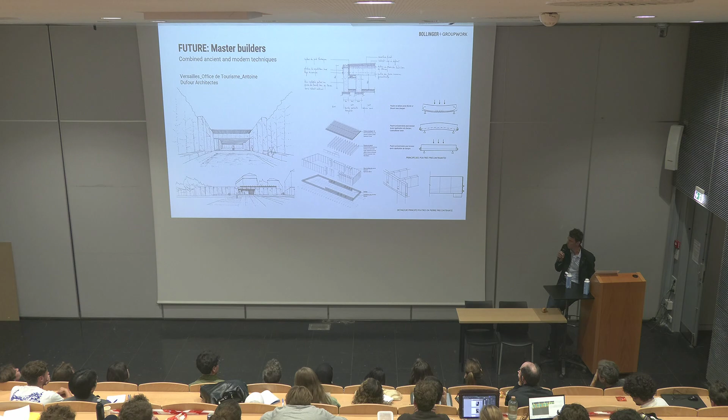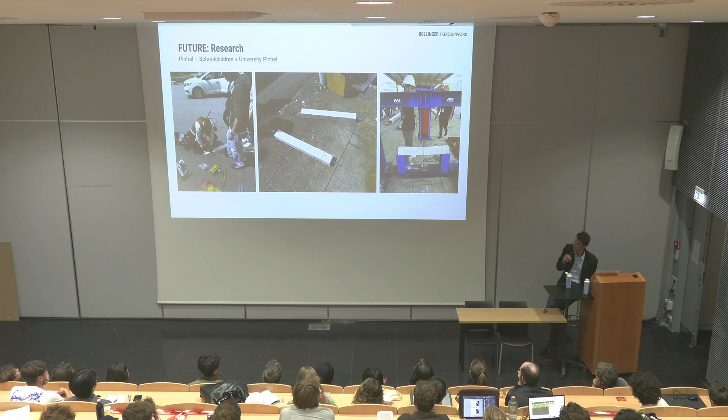So it's knowing about the old, going for the future, and prototyping. This is also the future research. This is in a children's school in Portugal, where we did some pre-stressing with some kids. It took them 5 minutes, they tested it, and then they made a big one of 10 meters. The 10-meter beam is only 28 centimeters high. We stood on it with 10 people also.

So it's not so complicated, but this professor is quite crazy, so he makes his own tools, the one with the helmet, and he's just testing around all the time. But then it has to find its way to the construction site. So we all have our role to play, but we will have to do some prototyping in real time on real buildings and use the power of each of them.

And I took the last picture of your office standing on something. Well, yeah, it's another one of those beams. I think it's 12 meters long or something, maybe 16 meters. Unfortunately, there's too much rubbish in front of it, but otherwise, yeah, it's up in the air.